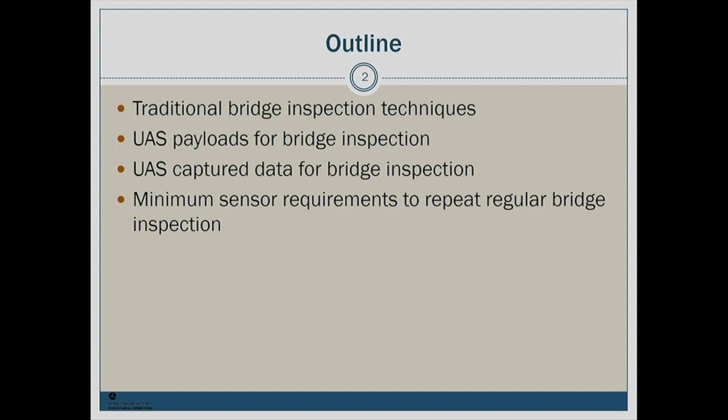Thanks for the introduction. I'm glad to be here today to share some of the findings of our ongoing research project, which is about use of UAS for bridge inspection. So this is the outline of our presentation. First, I'll talk briefly about traditional methods for bridge inspection, and then move into UAS application in bridge inspection, the payloads, the data that we get from UAS and sensors deployed on UAS, and at the end, what are the minimum requirements of sensors to repeat the regular bridge inspection.

So traditionally, inspecting bridges requires some sort of work platform like ladder, snooper, or rope access, depending on type of the bridge and the traffic control needed and the ability to close the lanes. But regardless of the method used to carry out the work, the associated cost and time and danger is still a challenge. For example, snoopers require training and expertise. It's expensive. Rope access requires a high level of expertise to be used safely.

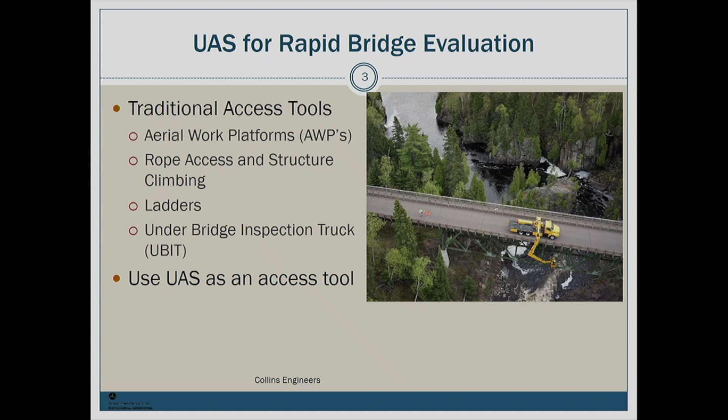So UAS can be used as an access tool and as a supplement to hands-on visual inspection. It could provide the close detail necessary for a thorough and reliable inspection, to make bridge inspection safer and more cost-effective. UAVs themselves cannot do the inspection. They can be used as a supplement to bridge inspectors to assess condition of different bridge elements in accordance with the National Bridge Inspection Standards. So UAV can provide a cost-effective way to obtain detailed information that may not be normally obtained through regular bridge inspection.

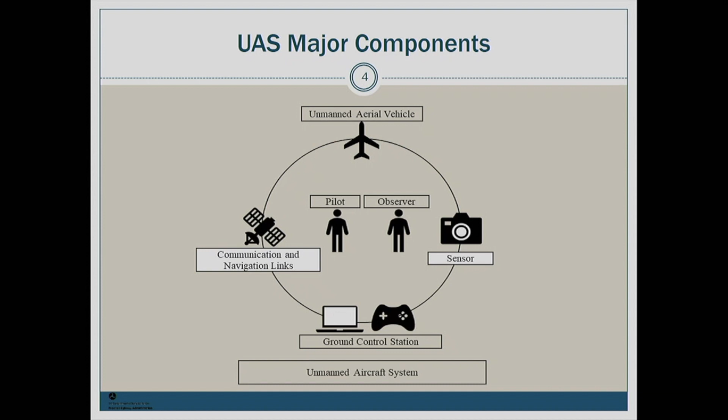So this picture shows the major components of UAS. You have the UAV, which is the platform. You have the sensors, which are deployed on the UAV, and it's your data collection mechanism. You need at least two people, the pilot who operates the UAV and the observer who spots the area for the pilot to capture data, the ground control station, and communication navigation link.

So the UAS can reduce the cost of inspection in some cases, but mostly the data management associated with the data captured by UAS is a challenge. Advanced UAV platforms and sensors with an experienced operator and experienced pilot might be required to get the maximum benefit. Based on a study conducted by Minnesota DOT, their average cost saving was up to 40%. And the cost saving comes mostly from the traffic control and eliminating or reducing the need for access tools.

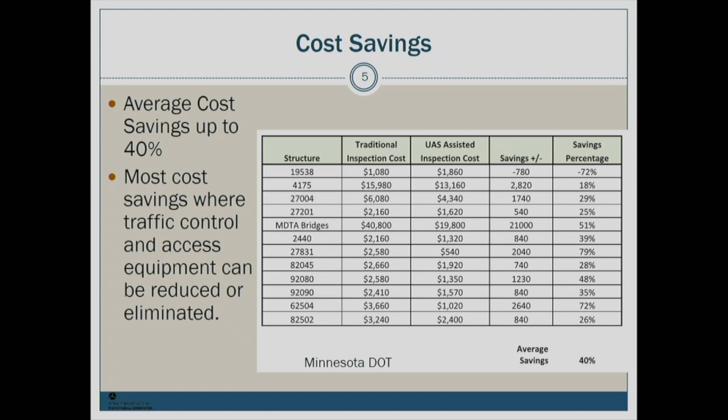So generally, UAS works well for large bridges in open areas, bridges that need some sort of access methods or traffic control, and areas that are difficult to reach. But it doesn't work well for bridges with high daily traffic, in heavily wooded areas, and also fracture critical bridges, because the use of UAS for fracture critical bridges is limited with today's capability of sensors and cameras. Today's cameras are not able to see through dirt, debris and corrosion to find the critical defects. So with the current technology, the NBIS, or National Bridge Inspection Standards, require hands-on inspection on fracture critical members.

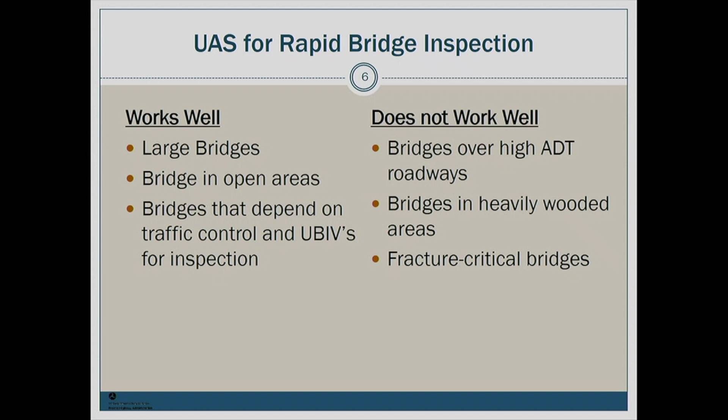So these are the typical sensors that are being deployed on UAV for bridge inspection. One is GPS to locate the UAV, ultrasonic sensors that work like collision avoidance, high definition cameras for capturing HD images to record surface defects or surface characterization, infrared thermography cameras to capture infrared images to record subsurface damage, and also LiDAR to get a 3D model of the structure, or a surface recording of the structure, like the surface defects.

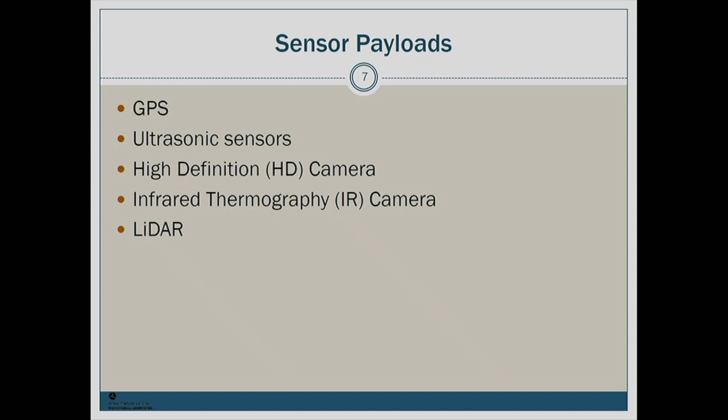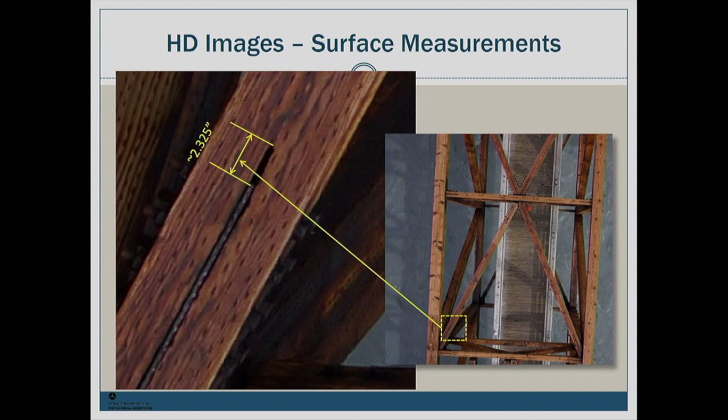Also, by using an HD camera, UAS can get a camera into difficult-to-reach areas to help detect and capture images of structural defects during routine inspection. So UAS can be used as a cost-effective tool for obtaining information that visual inspection or the bridge inspector cannot obtain without such a tool, not as effectively as UAS.

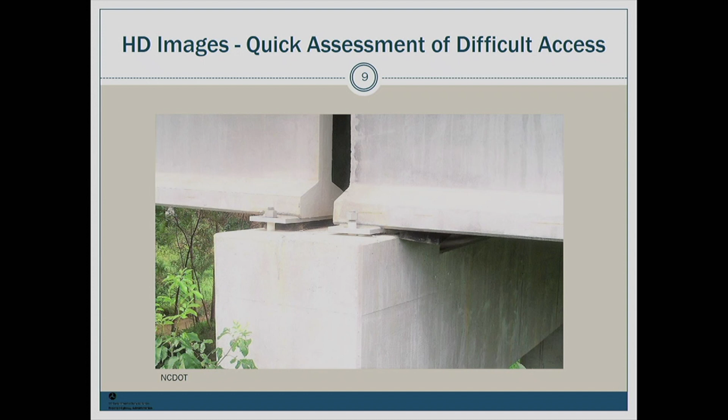Another example is IR images captured by an IR camera deployed on a UAV. Infrared imaging of bridge decks and elements is a common technique; it works based on heat transfer and temperature variation. Basically, the good areas and bad areas, for example on a deck, have different heat radiation and heat transfer, so they can be detected through an infrared camera.

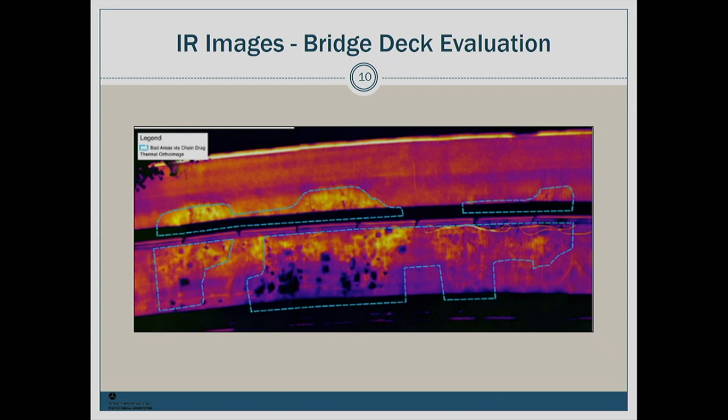As you see in this picture, the blue dashed lines are delaminated areas detected by sounding techniques, which is a traditional way of inspecting bridges. And as you see, there is a very good correlation between the sounding techniques and the infrared camera. This is another example of using infrared images for a quick evaluation of the deck and also the superstructure, the truss members.

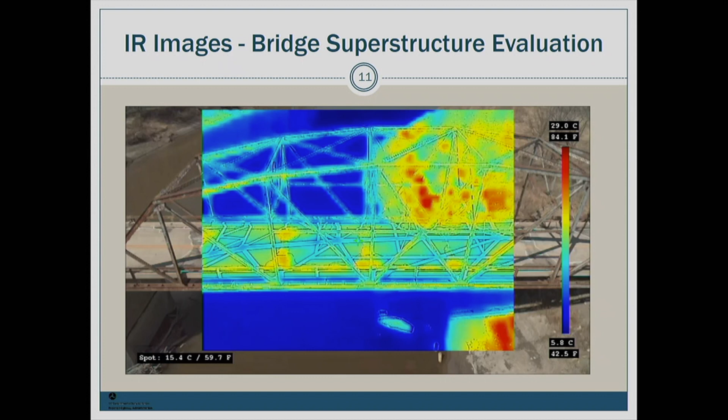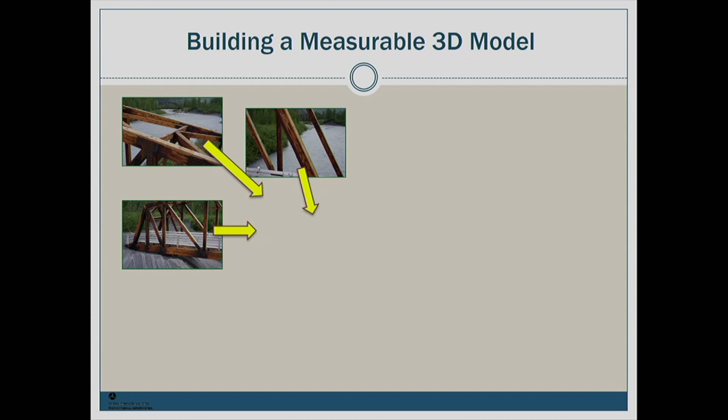Also, by using UAS, you can build a 3D model of the structure by capturing high-resolution images from different angles and different locations of the structure. It's a vast amount of data, and these images are then processed by the software to create a point cloud generated from the photographs and the GPS data, and then by processing the data, we can build a 3D model of the bridge.

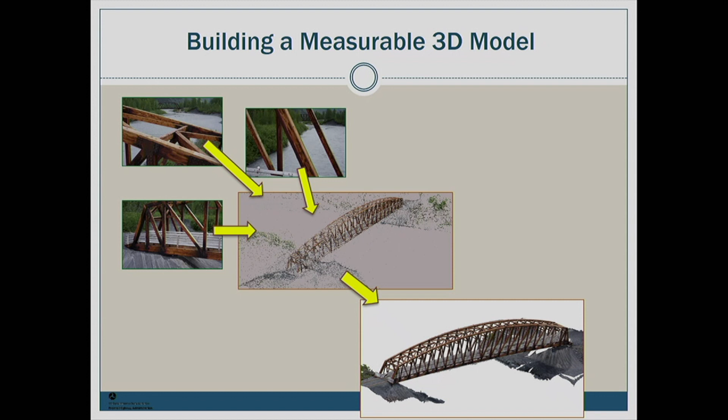This 3D model can be used for finite element model updating, which is used in the monitoring field. We can use it for measuring deformation and displacement. We can use it for measuring section loss, volumetric changes, and also to monitor any visual changes over time.

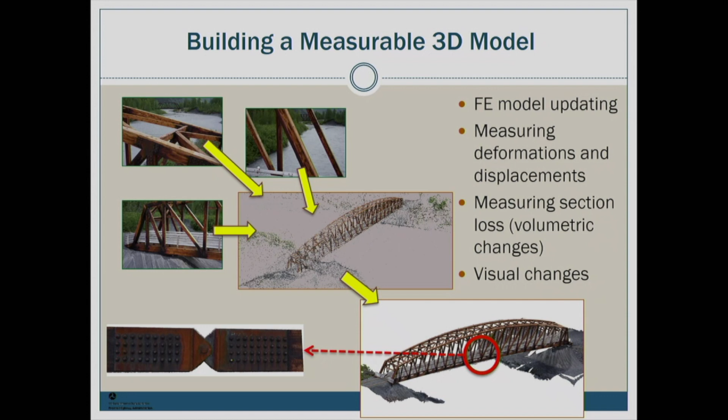Also, as you can see in the picture in the bottom left, you can zoom into your model and bring up a detailed image from your model as if it's a high-resolution image, and take a closer look, take measurements, or detect any defect, which would be hard for the bridge inspector to do manually without the use of UAS.

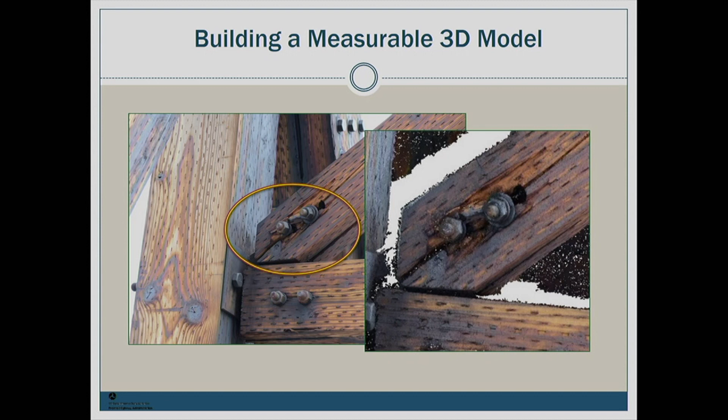This is another example that shows you can get a detailed image and visualization of a portion of the structure by zooming into the model and extracting that information as if it's just a picture. So the 3D model can provide a high-resolution image of the bridge structure. Or the inspector can click on the model and bring up all the photos related to that point, again to take measurements, detect any defect, and inspect the area.

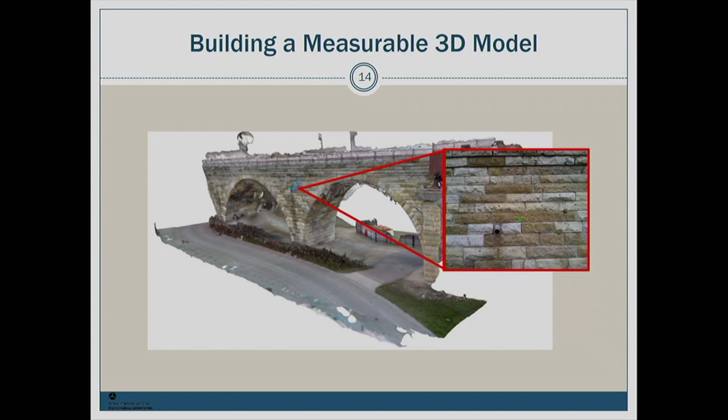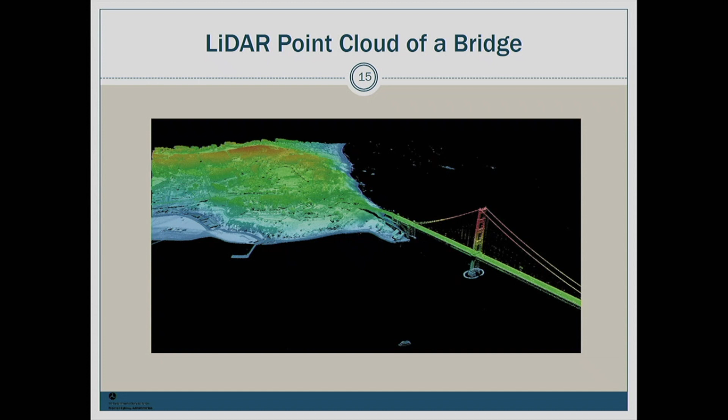Again, another example, use of LiDAR to generate a point cloud of a bridge. And this 3D model, again, can be used for model updating and to monitor any changes over time.

As part of this project, which is still ongoing, we are setting some minimum requirements for cameras and sensors for regular bridge inspection. These parameters are the minimum sensor pixels, minimum ISO, minimum aperture setting, minimum shutter speed, minimum standoff distance, wind speed, lighting, etc. The first phase of the study was through field testing, and the second phase, which is still ongoing, is in a controlled lab environment.

The first parameter was the ISO setting. During the field test, the research team found that the best imagery was captured by adjusting the ISO setting and letting the camera set the aperture and shutter speed automatically. So the parameter that was changed in this case study was the ISO setting. The ISO setting adjusts the sensitivity of the sensor to light. Increasing this setting allows more light into the sensor, compensating for low light.

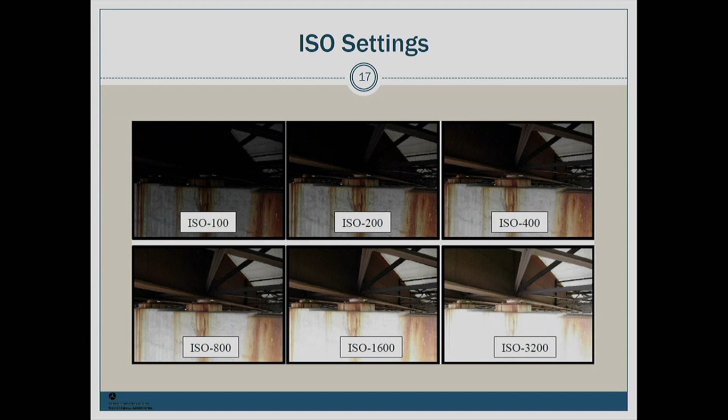The other parameter that we looked into in field testing was the type of lens.

So the type of lens affects the quality of the image. If you use wide angle lenses, it increases the field of view, but it also distorts the picture. So if you want to take measurements from the picture taken by the camera, you cannot use the wide angle lenses, or you have to make some correction to the image before you use it for taking measurements.

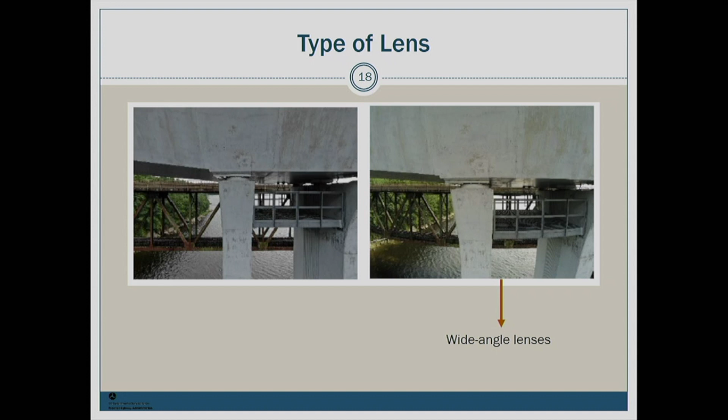So as you see in these two images, the image on the right, we use wide angle lens. You see that the image is distorted. So like I say, if the inspector wants to use this image to take measurements, they either have to correct it for the distortion or not use wide angle lens.

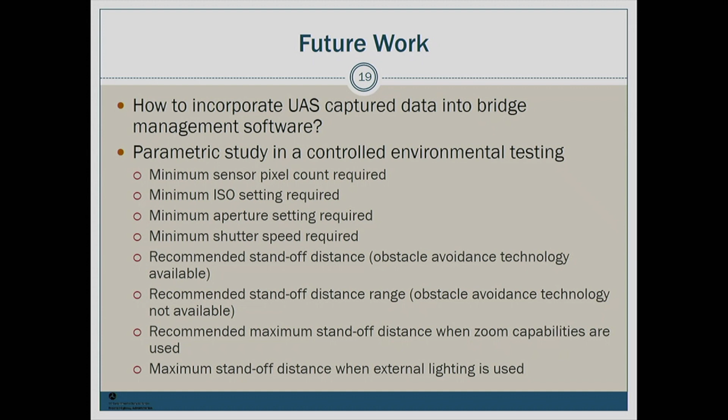So like I said, the future work is investigating how to incorporate the data that we capture from a UAS into bridge management system. And the second ongoing work in this project is to do a parametric study in a controlled environment testing to set the minimum sensor pixel, ISO setting, aperture setting, shutter speed, and the minimum recommended standoff based on different variables, like if there is collision avoidance on the UAV or not, if there is enough lighting or not, if there is any zoom capability on the camera or not.